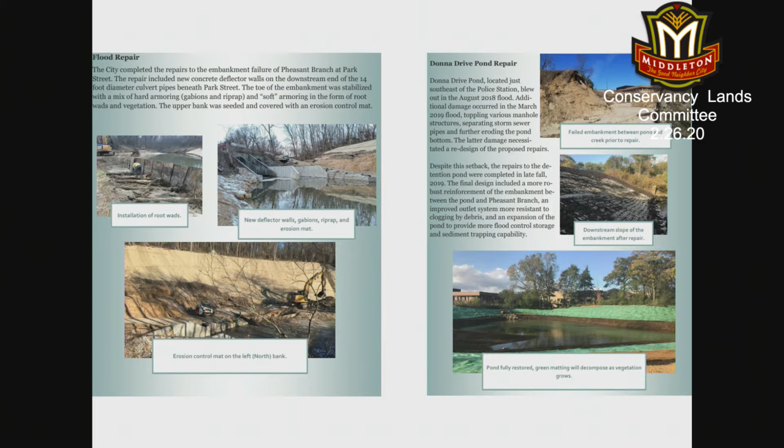And a lot of those were highlighted. These are excerpts from this year's 2019 annual report that the city did. On the left shows the repair work that was done adjacent to Park Street, where there was a significant erosion. On the right shows behind the police department, the Donna Drive detention pond and the repair work that occurred there. Baskerville Harbor, off of Lake Mendota, there was some damage to pilings along the harbor, and those were repaired in late 2019. And the previously mentioned floodplain study.

And then in the park system, there's been a number of repair projects and some temporary repair work. The Stricker Park tennis courts have been reconstructed. The bridges throughout the creek corridor were temporarily restored using a lot of gravel, is the best way to sum it up. The city also contracted with Ayers & Associates to redesign the Market Street and Airport Road underpasses, as well as the entrance to Woodside Heights Park that were all three heavily damaged in the flood, and that project is underway. Both of the underpasses have been reconstructed, and the work at Woodside Heights will start this spring.

And then there's discussion below about the joint funded master plan report between the city and Friends of Pheasant Branch for the creek corridor that'll be discussed here shortly. Future plan projects: as the flood study was completed, there's a number of projects that Water Resources is taking a look at. I know some RFPs have gone out this week that Gary Huth from our engineering department has been working on. And those are going to focus on potential upstream stormwater capacity enhancements and looking at Esser Pond, the South Pond, South Fork, Confluence Pond. There's also plans or efforts underway at Graber and Tiedemann Pond.

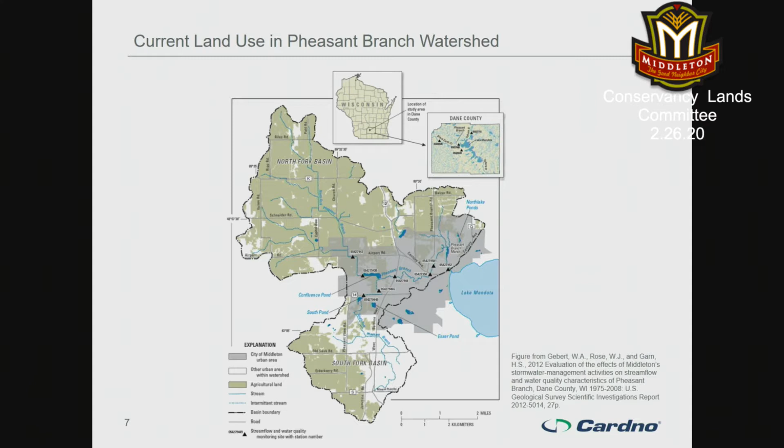But I just want to take a step back and say there's a lot that goes on when you think about the overall flood mitigation of the Pheasant Branch corridor. And this plan is specifically focused just on the area between the Confluence Pond to Century Ave. So with that, as an overall scale, we know that the Pheasant Branch watershed has lost a lot of the wetlands over the years and is urbanizing. And you can see that some work from the USGS shows that flows of Pheasant Branch over time have been increasing as well.

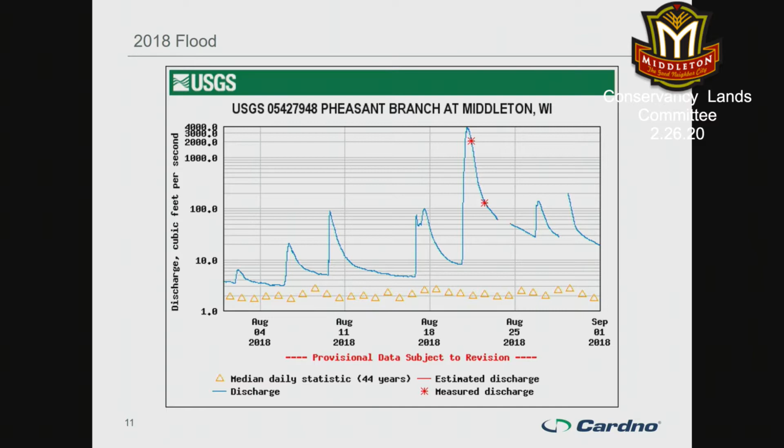And the whole reason why we put this plan together in the first place is in August we had 11 to 15 inches of rainfall in 12 to 24 hours. So just a massive amount of rain. And, as a freak thing, it was almost a bullseye. The largest rainfall was centered nearly directly over the Pheasant Branch watershed. So a majority of that water had to come through Pheasant Branch. And in turn, the flood peak for that flood was over 4,000 CFS, or 400 times the amount of water that goes through normally. That resulting flood, as we all know, had a ton of damage, including a lot of stream bank erosion, which you can see.

One of the things that I find so great about Middleton, seeing all of you here and having worked in the corridor, is that there's a lot of public interest in the Pheasant Branch corridor. When I'm down in the creek corridor, I spend just as much time talking to interested residents on what we're doing, why we're doing it, and how it's going to affect different things, as I spend talking with the contractors that I'm actually working with. So people are very inquisitive, and I think that's a really good thing.

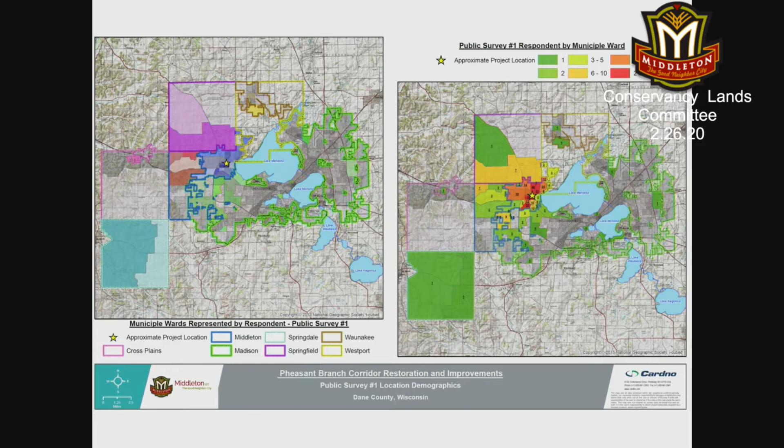So this is just a quick summary. On the left shows all the different areas that were represented in the public online surveys that were taken, and on the right is just kind of a heat map. So you can see that, as expected, a majority of the input on those surveys did come from around the Middleton area and around the corridor area. But also, I think this shows a nice representation of people from outside Middleton that also really identify with the corridor and took the time to answer questions about Pheasant Branch as well.

And some of the things that came out that were pretty interesting is over 70% of people that answered the first online survey said that they visit the corridor at least weekly or greater. So that was a huge number of people that really do use this corridor frequently. And having input from them was really beneficial, because these are the people that are using this corridor on at least a weekly or daily basis.

Another thing that came out in general was that the corridor is used for exercise and nature. So bird watching and keeping it natural was a common theme for a lot of the responses that we got from the public. And what people really wanted to see us focus on as we went through restoring this area was the stream itself, or the creek, and the trails. So a lot of what you see within this master plan focuses on those 2 aspects of this area.

So in general, the corridor is valued by the community and has various users that want to see it kept as natural as possible. And it came up in a lot of the comments to use this flood damage and flood event as an opportunity to not only replace what was lost, but to see how we can make it better, so that it can be a better, more beneficial place for all the users in the future.

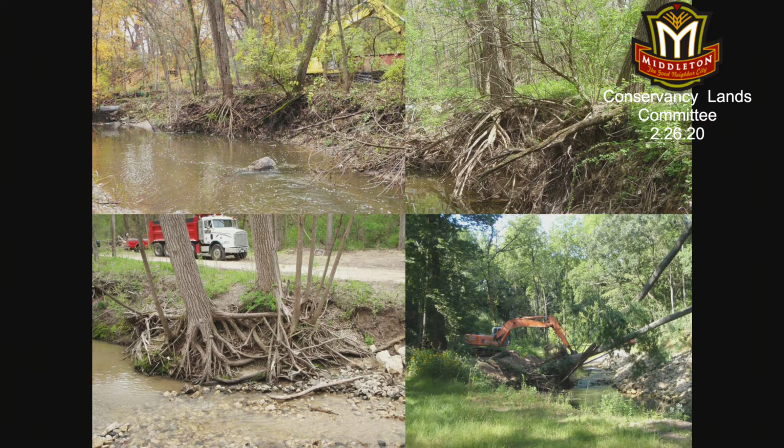And as you can see, there were thousands of feet of stream bank that were either extremely, very, or highly eroded as a result of flooding and some of the collapsing banks and water that got piled up behind bridges and things like that. So there's a lot of damage to the stream banks, and there's also a lot of trees that didn't collapse completely and are still out there, but are basically not going to make it very long. Most of the soil and dirt has eroded around their roots. A lot of them are leaning and are about to fall over.

But those trees can be used as a resource in the stream bank restoration to stabilize eroding stream banks, but also to create underbank habitat for fish and amphibians. They can be oriented in ways through the use of different kinds of structures. Toewood is a big one that we at Cardno like to use. It creates underbank habitat where amphibians and fish can hide underneath the bank and are protected from predators, and it's oriented into flow to create helical flow and scour to help create deep pool habitat within Pheasant Branch that is currently lacking in the system because of all the material that was deposited during the floods.

So yes, there will have to be more trees removed that are pretty much dead man walking anyway. But I think reusing those trees in a manner that will create benefits to the stream corridor is an important part that we tried to really focus on in this plan.

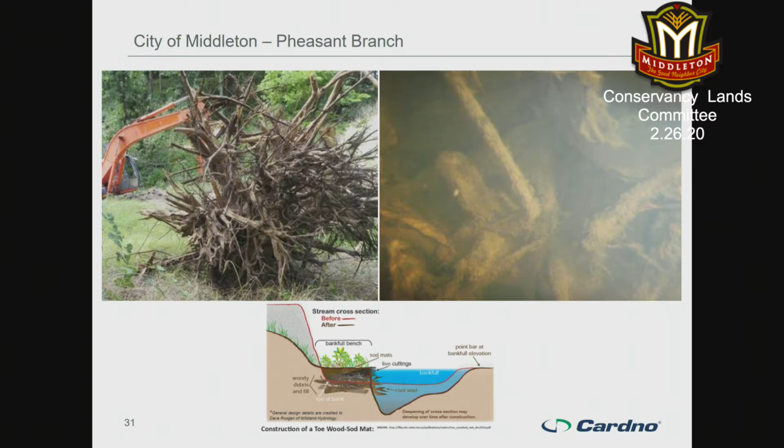Another thing that having this wood in the stream banks does is provide a food source for aquatic insects, and those aquatic insects then start basically little micro food chains where different things feed off of those insects and different things feed off of them. So they can be a really great resource instead of just pulling everything out and chipping it.

Another way to address some of these eroded banks is putting in stream structure configurations that can actually redirect flow away from the bank. So using stone, boulders, wood, different things, you can orient those into flow so that they actually will force flows back towards the center of the channel and create near bank deposition. So you could take an eroded area and use these structures to go from an area of active erosion to induce actual deposition on that same stream bank, depending on how you engineer the structures.

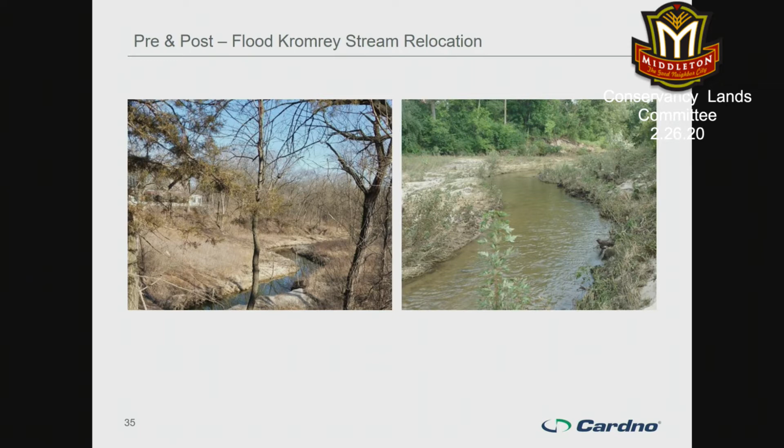And this is just a photo of that same area here last August. So you can see that the banks are still in good condition and have good vegetation on them. So there is some opportunity to do more of this based on how that area made it through the 2018 floods. This is just a figure out of the floodplain study that EOR did.

So there may be some things within the channel that we can do to help dissipate stream energy. But I think the overarching theme that should be taken into account when we look at restoring the creek corridor is to dissipate stream energy wherever possible and try to increase that flood flow capacity through the corridor so that you don't sustain as much damage during the next flood event.

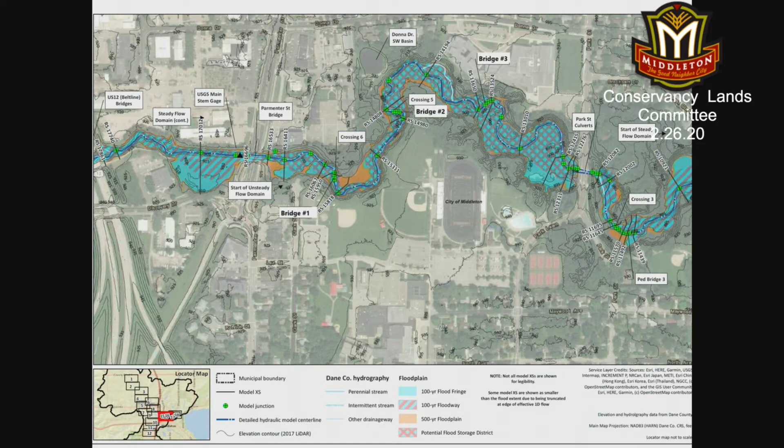Another thing that really shows up on this map is that pretty much the entire valley from wall to wall is inundated with water during a 100-year flood. So trying to design a bridge that can pass a 100-year flood in this area isn't going to work unless we span from the top of the valley to the top of the valley, which isn't very realistic for this area, but just something that I wanted to point out. And then I will now pass it over to Linda to talk more about the bridges.

All right. Hello, my name is Linda. I'm with KL Engineering. I'm a landscape architect. I've been doing trail design and construction for about 21 years, give or take. So I'm just going to go over the bridge and trail portion, give you a summary of what we all found. So your existing conditions, what's out there kind of looks like this.

5 mainline bridges with bike and pedestrian use. You have 12,000 pound vehicle design load with 12-foot clear width. Railing height, 54 inches. Kind of hard to see, but galvanized sill pan substructure. What I mean by that is you have the bridge itself and they're sitting on pans that are like this big. And that's how they're anchored. Wooden deck and railing.

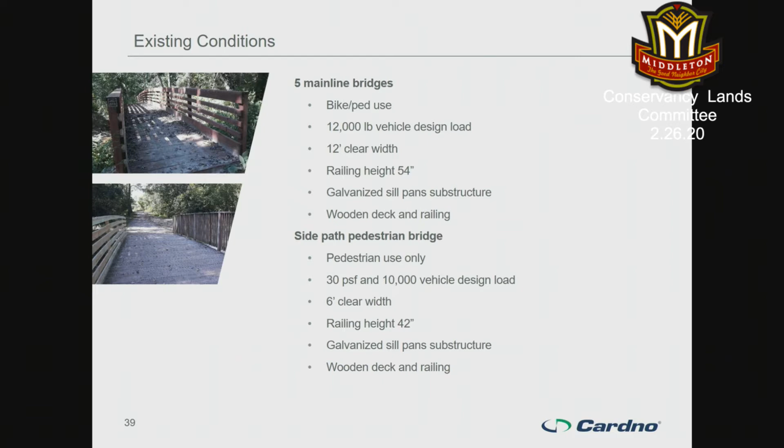There is one side path bridge, which is the top picture that you see. Pedestrian use only, 30 pounds per square foot. That's your pedestrian loading, 10,000 vehicle design load. Do you guys have a 10,000 vehicle that's only 5 foot wide? 6 foot clear width. Railing height is 42 inches. Same thing with sill pans and wooden deck and railing.

The loading, 90 pounds per square foot and 20,000 pound vehicle. This then is 14-foot wide clear. One of the comments in this design was that there were at times conflicts between bicyclists and pedestrians. So going with that 14-foot wide clear helps on your bridges. Ipe wood decking or asphalt, depending on maintenance needs.

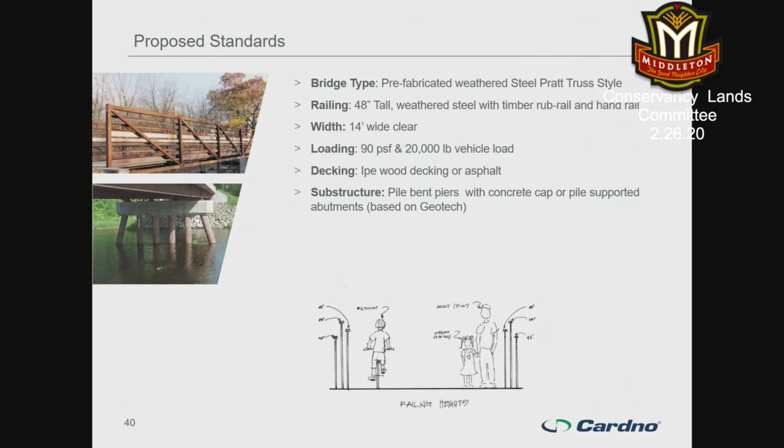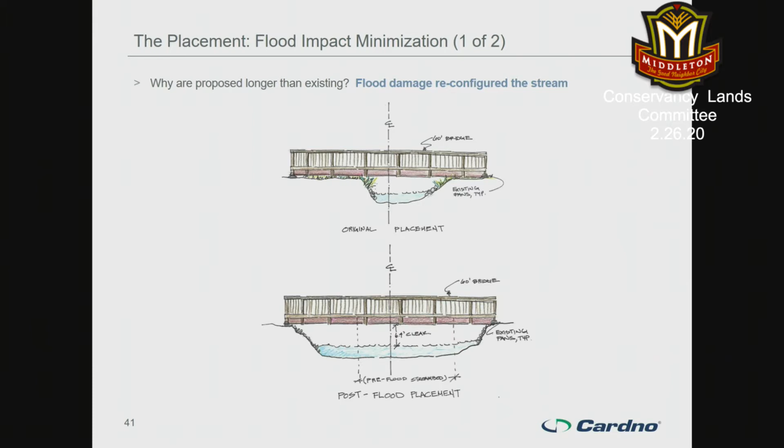The pans, which are those little gray things right there, are sitting basically right there. It's not sustainable. So, why we talked about the flood damage.

So now if you look at these two pictures, because the flood damage reconfigured the stream, we have the wider opening. Where it's at right now, you have 6 foot 4 inches clear at bridge number 2 from your ordinary high water to the bottom of your headers.

What that means is when we have any sort of higher water, what we want to get is more clear. As Aaron referenced, we can't get the 100 year. There's no way. We'd have to be 50 feet, right? But we just want to have more than we currently do. So we said, okay, looking at this, let's go for at least 8 foot.

So we did. That 8 foot clear, if you look at the bottom, this is what we're proposing. If we have a flood event, we're aiming for, let's say, 50 year if we can. At least we have more. So that can keep on rising and we still have that clear, so it's not hitting anything.

Now another question that can come up is, we have those bridges right there. Why don't we just shove some piles in the middle and extend? Good question. The negative of that is you want to keep it clear. Anytime you put more stuff in the middle, you're going to raise the flood elevation back, and you're making one more thing that a tree can hit and create that log jam, as Aaron showed. So, clear span with the new substructures.

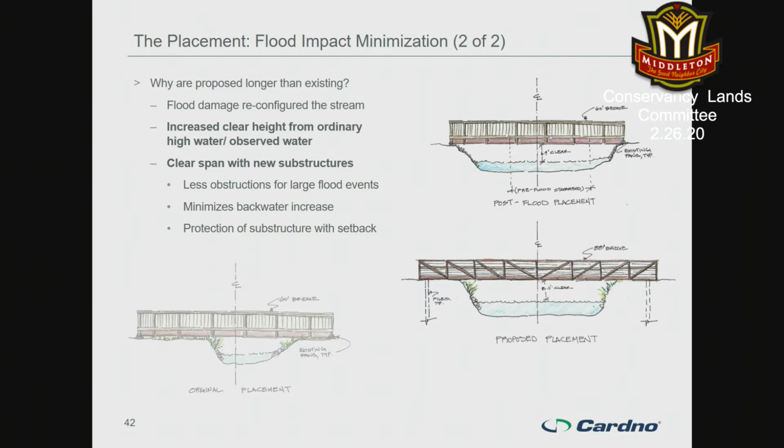So this is what I was talking about before. As Aaron noted, at bridge number 1 right now, the 50-year flood hits the low chord. Once you hit the low chord, that's going to be an issue. Look at bridge number 2. With a 10-year flood event it hits; we want to get it above 10-year. So these are our concepts, estimated cost, and proposed spans.

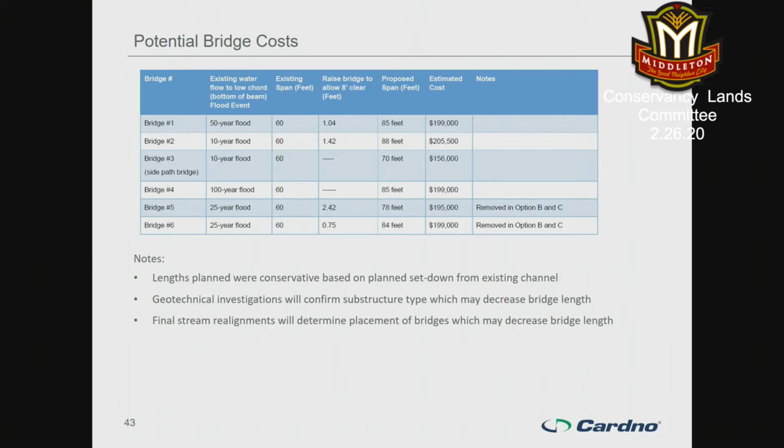One thing I want to say is based on the notes. The lengths that were planned were conservative, based on planned set-down from the existing channel. We'd rather be conservative than liberal. Geotechnical investigations will confirm substructure type, which may decrease bridge length, and final stream realignments will determine placement of bridges, which may decrease bridge length. We always want the shortest stream crossing possible, so if we're realigning the stream, we'll look to see where that can be.

Then the trail itself. Existing conditions: 10-foot wide porous pavement, 2 to 3 foot stone shoulders. Stone shoulders are largely vegetated at this point. Post-flood, they were repaired as possible, but you saw the pictures. However, pathway conditions deteriorated due to the heavy machinery cleanup, washouts, undercutting, heaving.

So at this point, the trail has some porous asphalt still out there, a lot of stone. There are some areas with inconsistent trail widths from the undercutting. You can see on that top picture how it did that. And tripping hazards, overgrown stone shoulders.

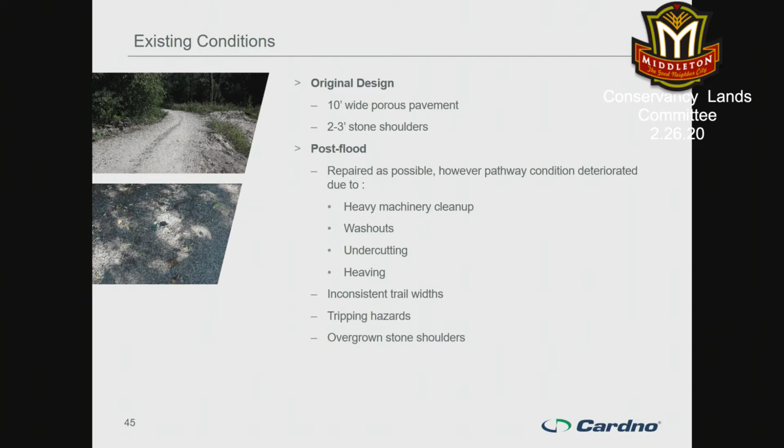During the planning process, we went through a number of options, and I have a quick summary on each. Option A was no change. Keep it as it is, just pave it. Ironically, that's the most expensive of all the options and didn't meet the criteria everyone wanted. Trail cross-section: 10-foot wide asphalt trail, 2-foot stone shoulder. Trail length 5,620 linear feet, 2.023 million.

Option B was we realign it, reducing the number of bridges down to 4. 12-foot wide asphalt trail, the intent being a wider trail so we wouldn't have as many bike-ped conflicts. Turf shoulder, length slightly longer.

Option C, realigned as well, but with this one, we went for some split use paths. I'll get into this in more detail in the slides. And that is the preferred option. Final trail alignment, one thing, this is a major element to reiterate, final trail alignment and bridge placement will be dependent on where the stream ultimately gets realigned, additional natural stormwater facilities.

What I mean by that is if in the design we're looking at areas that, let's bring it down, and topography-wise, okay, that's obviously going to play into that. And detailed design investigations such as geotech, natural resource inventory, et cetera. Right now we have these plans, but with the detailed investigation, we may have to scooch it, so to speak.

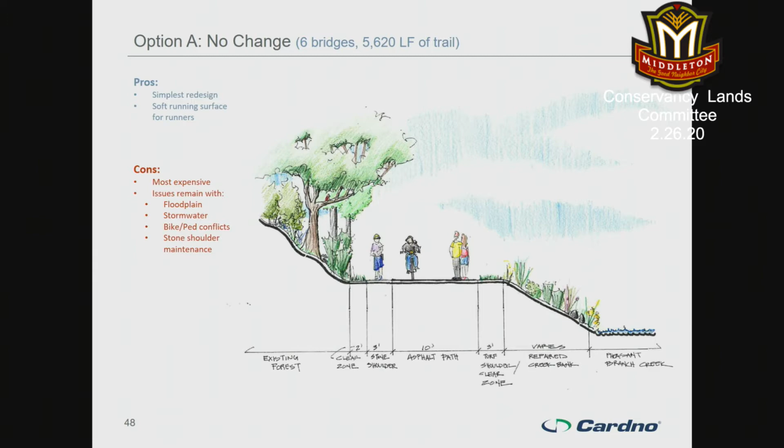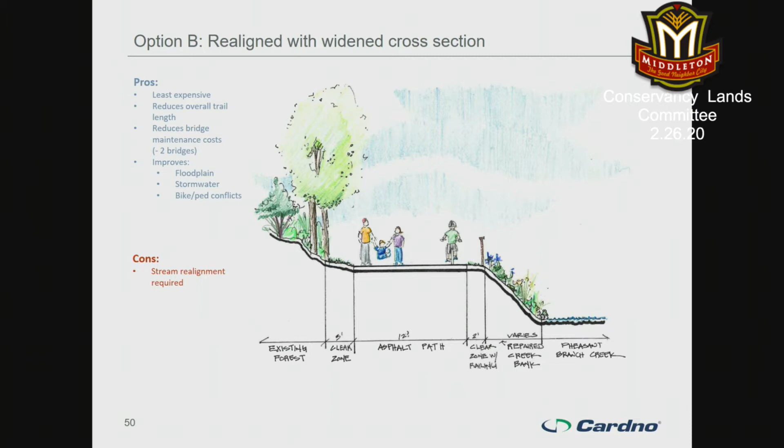Option B, realigned. So what you can see here is that we take out some of the bridges. Spectacular. This is what that then looks like. So now we have the widened 12-foot path, so it allows for a little bit more flexibility with both users. Cons is the stream realignment.

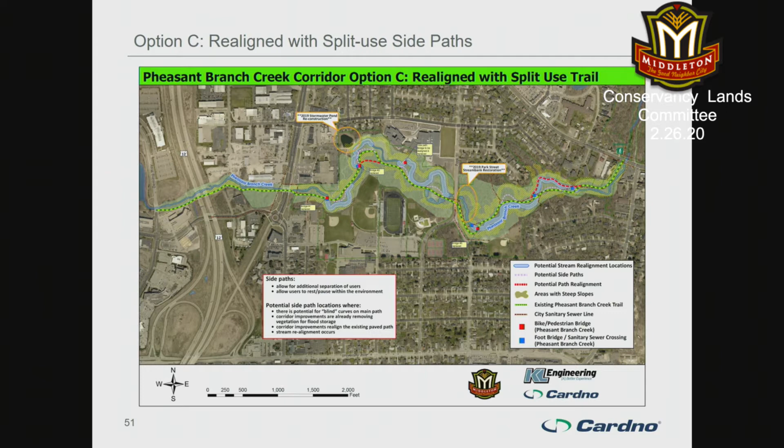The preferred option is realigned with the split-use trail. If you look at the mapping, the split-use trail is the potential side paths, which are on the screen, the light purple. And this is what that then looks like. Now, the potential side paths are not all over the place. The intent of that is to use those where we have the tougher, like blind corners, so to speak, if we have tight areas like that.

We focus them on areas that we've already realigned the trail, so there's already, let's say, the residual of an asphalt pathway there, or areas that have been vegetation removal or anything like that. My point being that the side paths are not going to be additional, we're not going to be tearing up more stuff. It would be at areas that we've already disturbed.

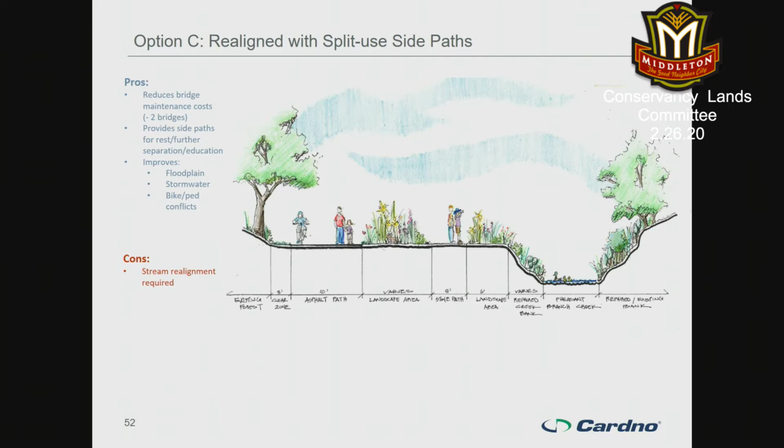But the positive being that it's allowing for people to rest and observe and/or take off the trail so you don't have the conflicts. This then reduces the 2 bridges and improves floodplain, stormwater, bike ped conflicts. That is our preferred option. And with that, I'm going to hand it off to Jens.

Hi, Jensen Ecology, part of the team with Aaron. I have worked with Middleton over the years on some potential projects down in this corridor, so this area was not unfamiliar to me. So what we did as part of this plan was just kind of do a very brief inventory of what we found down there as existing conditions and then opportunities to restore along with whatever stream realignment happens and trail realignment.

And so a lot of the details obviously will be worked out, but as you can see with this multicolored map, which is also up there and on the screens, is kind of the rough boundaries of the kind of habitat types that either exist or exist in kind of a degraded fashion or could exist with some effort on our part to restore them. So these would be either restored ecosystems or potentially created areas.

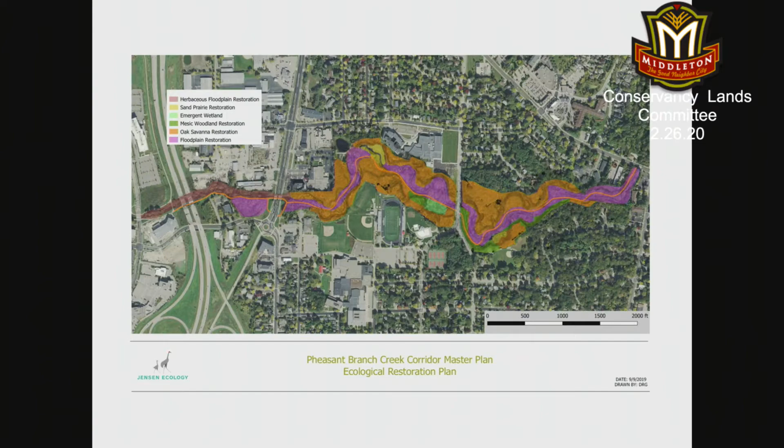And we'll kind of go through each one of them. And again, these boundaries are rough. They would be ground truthed when the project actually happened, but this is kind of what we found out there. So the first one, what we're calling kind of herbaceous floodplain restoration. Again, some of these names are a little interchangeable in some areas. So this would be the area from Deming to Parmenter mostly.

So it'd be way upstream, and this was kind of the channelized section of the stream that doesn't really have many trees. I mean, it's got some remnant oaks here and there, and then some lower quality trees such as box elder and cottonwood. So what this would kind of consist of is removing the invasive plants, regrading of the slopes to a plantable gradient, and to kind of create floodplain benches and drier species as we move upslope. It would get dry quite a bit.

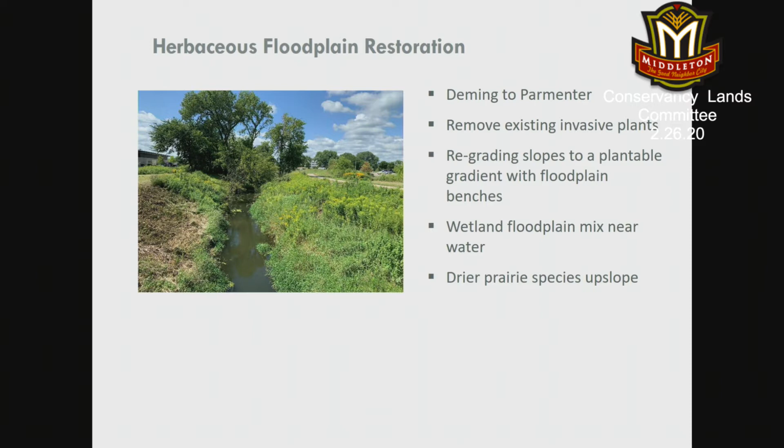But again, those floodplain benches or regrading would be in conjunction with whatever Aaron is deciding the grading to be. But there would be some opportunities in this area to do something of the sort. Maybe add a little potential sinuosity to the stream for habitat as well, and floodplain access.

But with all this deposition, to remove that sand would obviously be a huge cost and an unnecessary one, in my opinion. So to work with the sand that's there and do an interesting sand prairie restoration, think about some of the terraces along the Wisconsin River, for instance, where you have different sand-dependent species, gives you a lot of opportunities. There's several feet of sand in some of these areas, and I think it's an opportunity to do something interesting.

invasive trees, et cetera. And then another interesting thing is if Aaron does move the stream and abandon it, we can leave those old oxbows potentially to give us an opportunity to do some wetland habitat on site, and then potential stormwater storage as well.

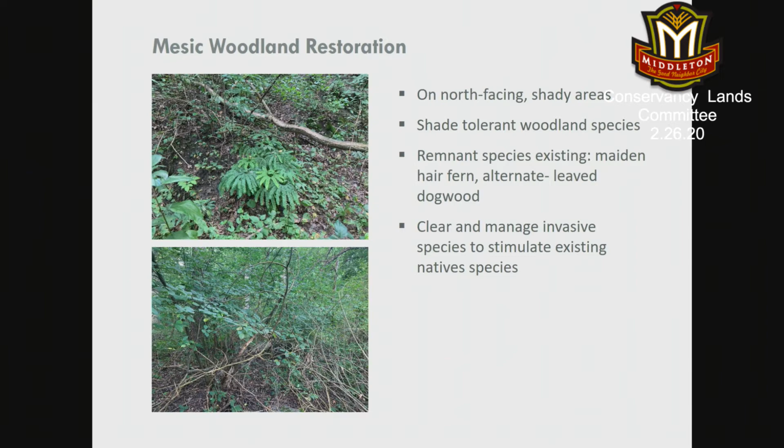The mesic woodland restoration, the more north-facing slopes in the corridor. Some remnant species we find like maidenhair fern and alternate leaf dogwood, more mesic type species. So those were indicators for us when we saw them. And so these would be more passively restored, with mostly clearing of the invasive trees and shrubs, and then managing invasives going forward.

So getting the sunlight back to the ground. And again, this is also an erosion problem, because underneath a lot of these invasive shrubs, it's just bare soil, because they've been starved of sunlight. And then managing with prescribed fire where you can in certain areas down the road could be something to consider.